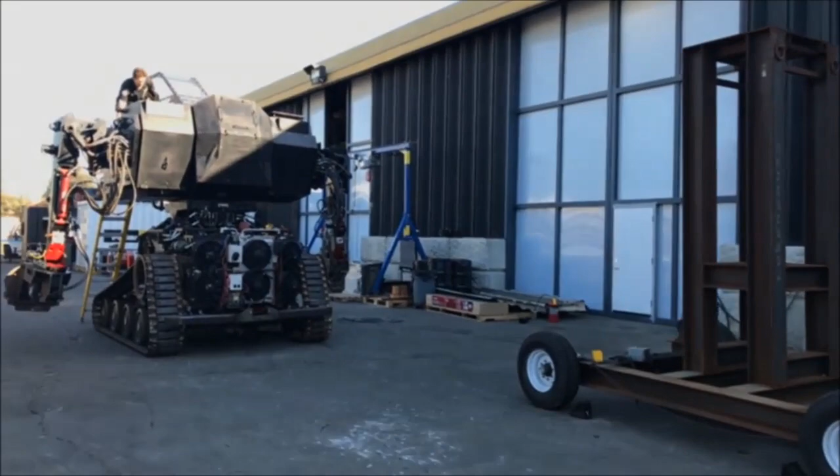Okay so are you getting any of this? All right, so we got a couple things. First of all we got a big announcement. This stream keeps cutting off. Then let's go over here. Yeah, we're cut. Okay, we're just going over to the other side, Wi-Fi's bad. We're going to where the Wi-Fi is not bad. Check 1 and 2, anybody on?

All right, this robot in the background. How about now? Oh, we should stand up. Yeah, get the rope, stand here. Don't worry, cameraman Miles is gonna correct that problem right away. Get the robot behind us. There you go, glorious Eagle Prime, she's got a good backside here. How about that? Yeah, that camera did need adjusting. Good job, G. Camera's good, been adjusted. Stream's back up, yeah it's back up.

Sweet, so we have some fun news for you, Twitch. On November 5th, not this Sunday but next Sunday, we are going to host what we're calling MegaBots Live. Sunday, Sunday, Sunday. So what we're doing is we're starting a set of hopefully monthly events where we just test a bunch of stuff. First thing we're going to test is we're going to take remote piloted robots and put them up against piloted robots. So we have Eagle Prime, we have new driver and gunner pairs for you.

Zoom up there, one of our new drivers, Orion, is going to get up in a second. What we're going to do is take Iron Glory, set it up to be remote control, and we're going to duke it out with Eagle Prime. Eagle Prime's going to have incredibly destructive weapons that we don't trust to be used against a human piloted Megabot. So you guys want destruction, you guys want live fights, we want to give you that, but we're going to do it in the form of beta tests that happen one after another, month after month. We're going to incrementally get better so we get faster robots, cooler action, more destruction, all live on Twitch.

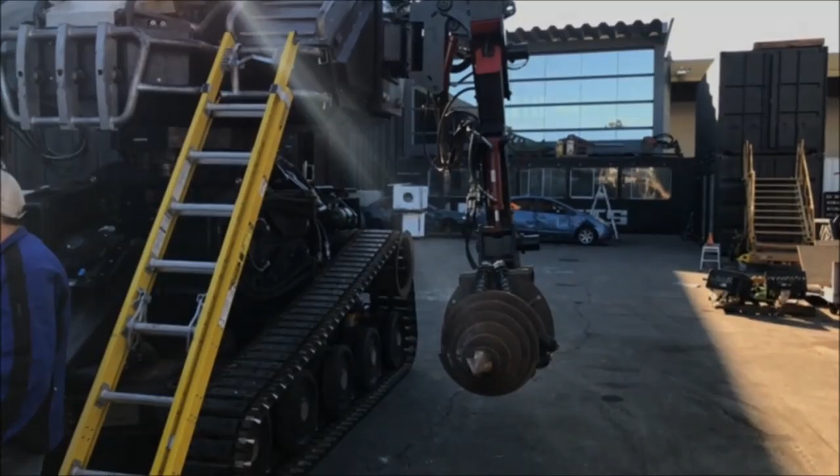And your mission, should you choose to accept it, is to destroy that oven. All right, team, don't disappoint us. Destroy that oven. We gotta do it better than we did last time. So let's keep the robot working.

We got the Tower of Extreme Caution right in the middle of the yard there. When did that change? That's the Tower of Death, that's what it was always called. We're gonna do a couple of slalom laps back and forth, just curving around that as though it was an enemy mech. You guys know the drill.

Let's see what's happening. God, that was terrible. You guys know the drill, go do your thing.

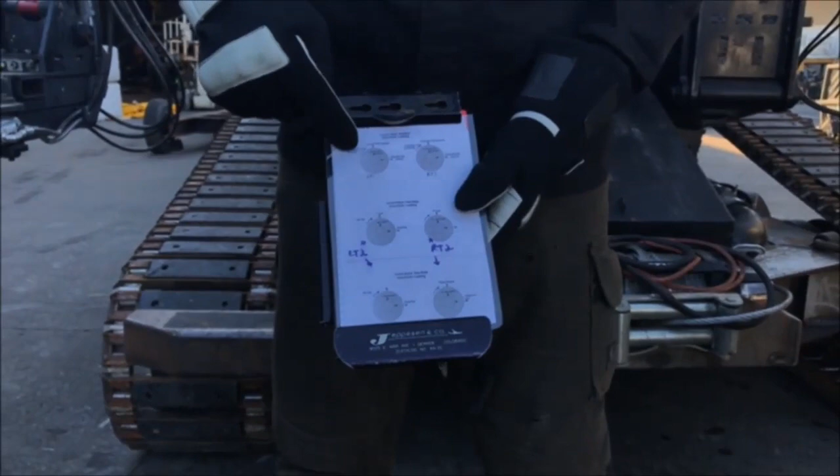Can we get a close up of what we have here? Cheat sheet, this is the in-flight computer. Tim, tell us about this. We have lots of control modes for the pilot that are hard to keep track of. So when those modes switch, I want to make sure I'm actuating the correct actuator. So I have this knee board that has the different controls and certain unlabeled switches that are different for different modes.

Describe what they do. So RT2 up here, it's high. And that's great, we're all set and ready to pilot this thing.

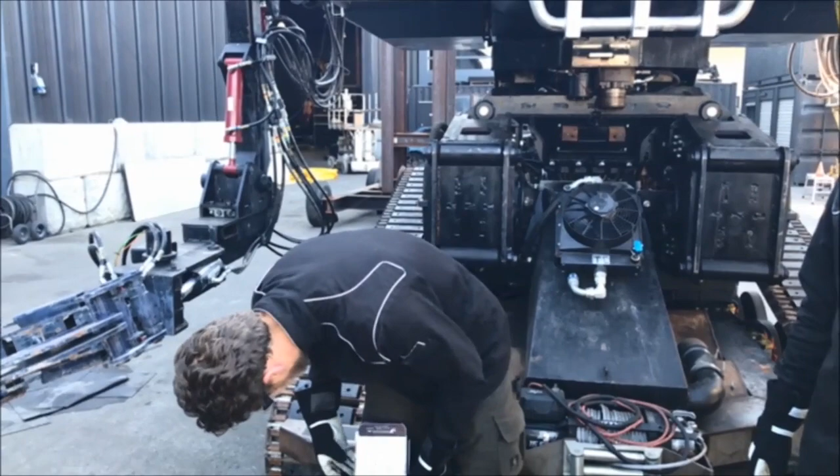All right guys, you guys ready? Up. Serious stuff, robot could break. If it breaks, Micah, you're on ladder. I got fire, cover whatever you need, find an extra fire extinguisher. Be ready. Please stay out of the way, anybody who doesn't have a specific job to do. We're gonna stay on comms, keep the comms clean. If you don't have something important to say, stay the heck off the comms.

If the robot should go sideways and you see an imminent threat to anyone's well-being, you will say stop, stop, stop, and wave your hands like a wild person in the air. This is good. Stop, stop, stop, cool? Who's on E-Stop? Mike is going to be on E-Stop. Is that okay? Sure, fantastic.

Let's get this thing rolling. Okay, first thing's drill, second thing's slalom. After that let's see what happens. No, first thing's slalom, you have to get to the thing first, right? Well yeah, fair enough, okay. Micah, let's find that E-Stop.

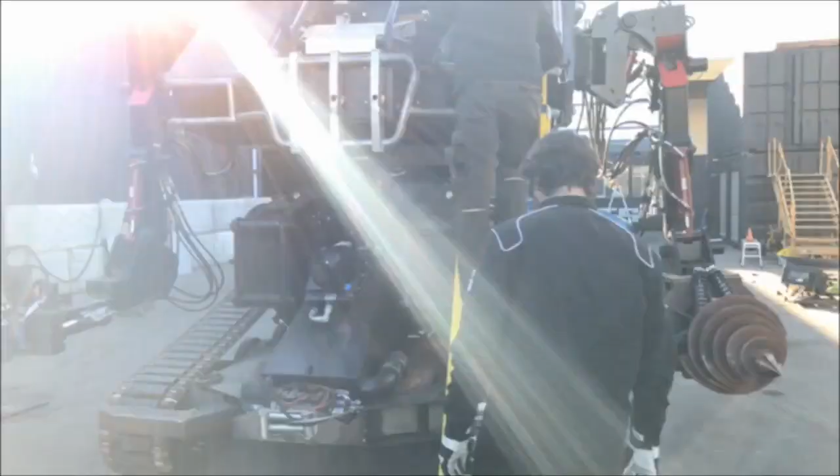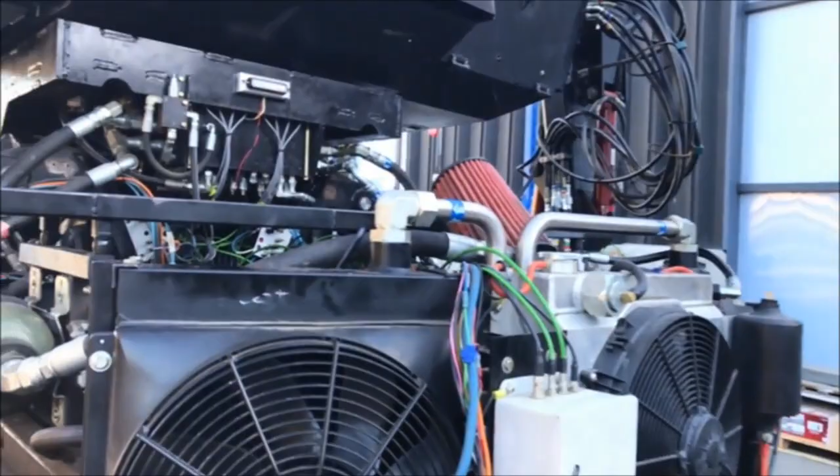So I'm going to turn on the power to the robot right now. Here we go.

Miles, before we get started, I want to call attention to the audience, make sure the audience is being safe up there. Did you check in with Randy? Is he okay? Oh, Randy. See, now we're not. Oh, there's the horn. Randy's a dummy, Matt, there's Randy's horn.

A dummy, you know, you don't have to say that to all of our fans, you know, I bet his mom is watching. You know, Randy's mom, I assume she's watching. I'm gonna grab a radio so we can do - I know your mom's probably watching. Good God, Matt. Hi Miles' mom, I'm going to slap you in a second.

Valves are up, engine coolant's 92 degrees Fahrenheit, fuel's at 58%. We are ready to start.

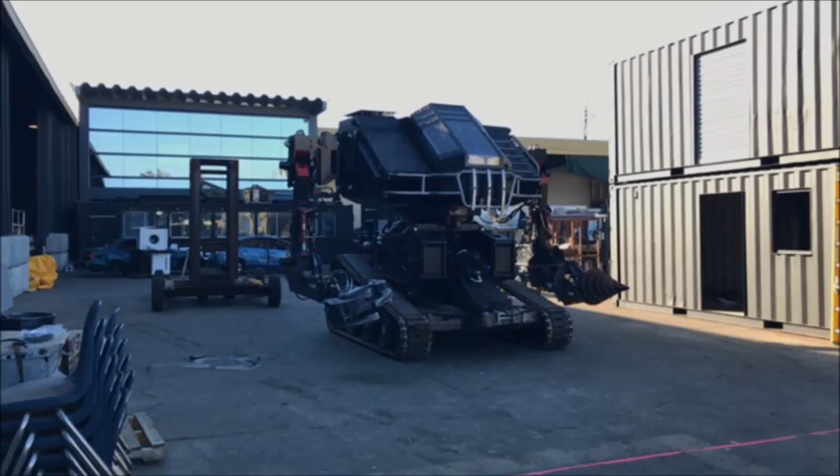Starting. Hang tight Tim, one second. Keep all low please. Yeah, Gurren Lagann, that is the one. All right Tim, sorry, Gurren Lagann, safe. That's where that drill E-Stop name came from.

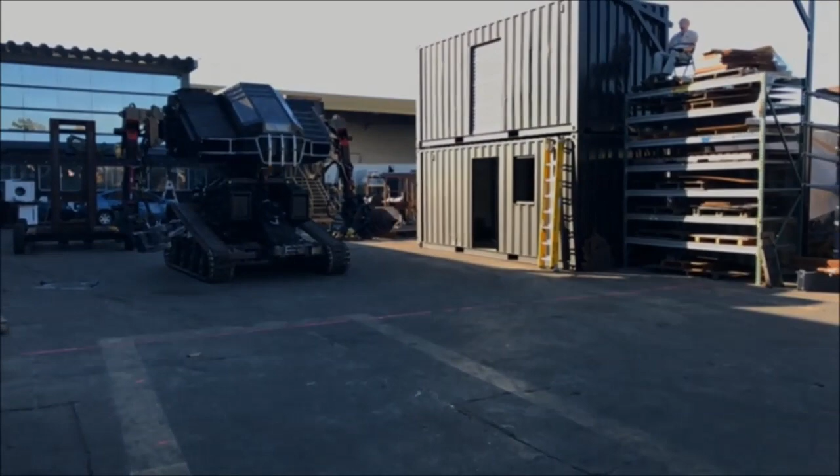What happens is if the hydraulic tubes are cut, it just starts leaking hydraulic oil.

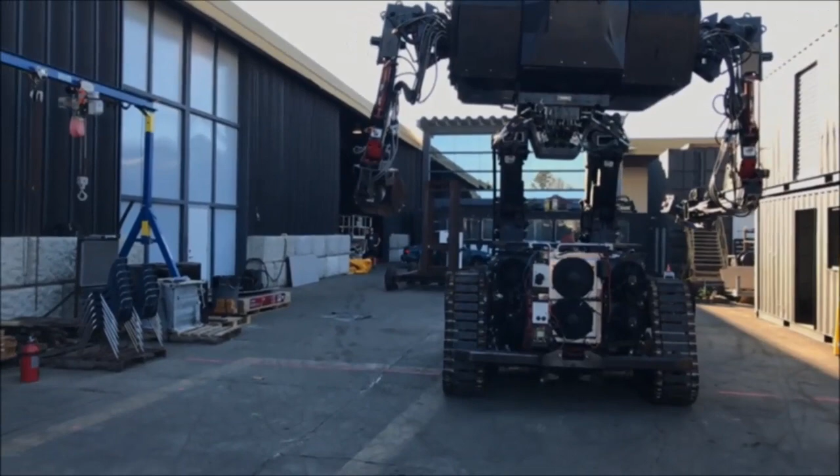Strike that, and there was a hydraulic dropout.

All right Micah, we low? Good. Cockpit, let's sit on. 10-4. Gunner all low.

Is the engine not ready? No, the engine was ready, that was the Beckhoff dropout. Because the engine was fine, it wasn't bogged down, it just happened suddenly. I don't know what we lost because we power cycled too quickly.

It's actually hard to get back far enough in the yard to get the full robot in frame. Copy, clear to start, I'm trying my best. Clear my front.

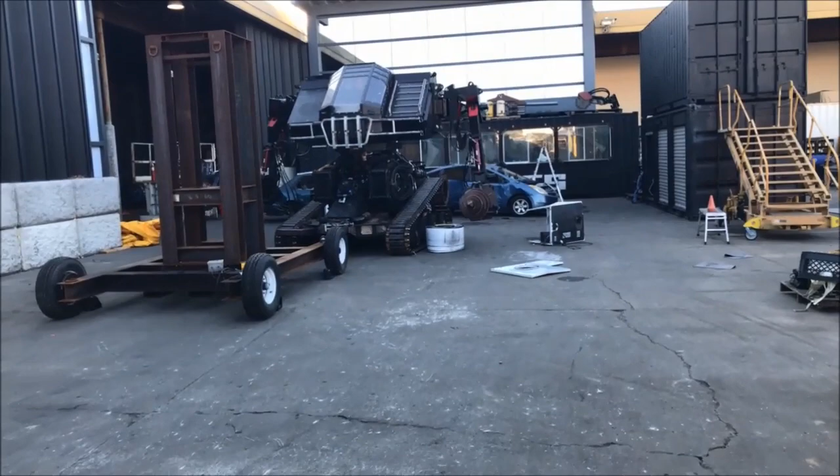And Orion, you're clear to pop the cockpit. Copy that, fresh air.

Oh yeah, that washing machine.

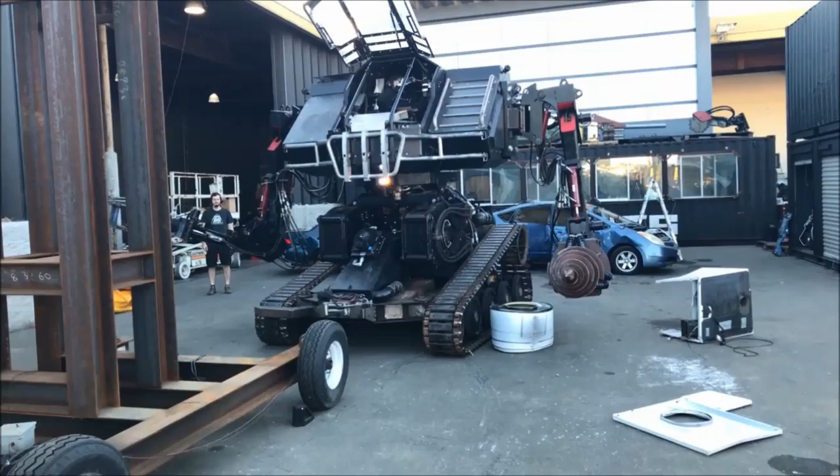And you can see Orion lifting the hatch because it is insanely hot in there. He wants to get a breeze. Cables on the back of the elbow, they are squished.

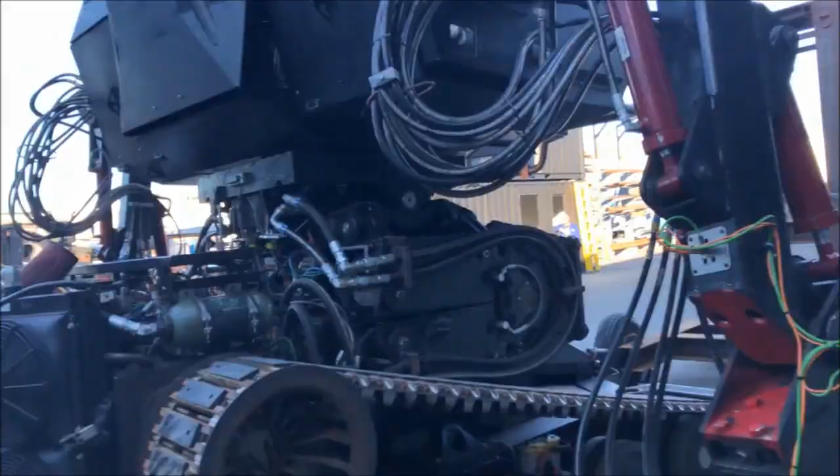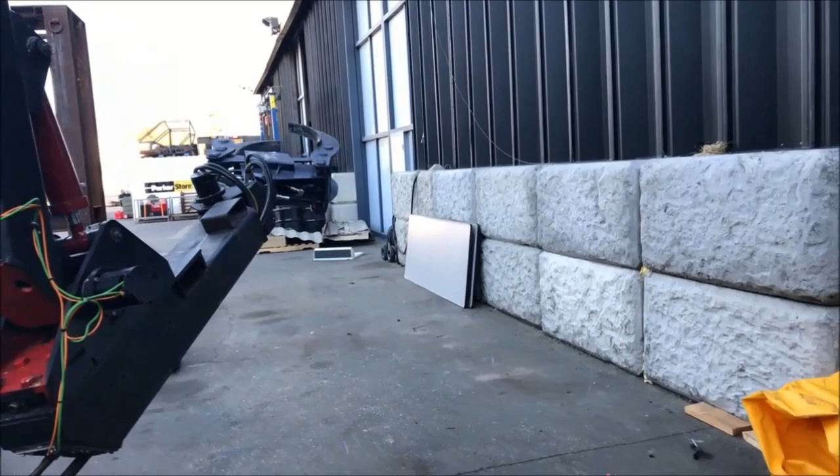Here? Where? Cables on the back of the elbow are squished. Oh look, yeah, some cables got squished. That doesn't look squished, that looks like it got pulled a little too hard. Same thing, same difference. That elbow is...

Right. Yeah, we're... It's nice to see it come down, but you wonder about some of the other temps.

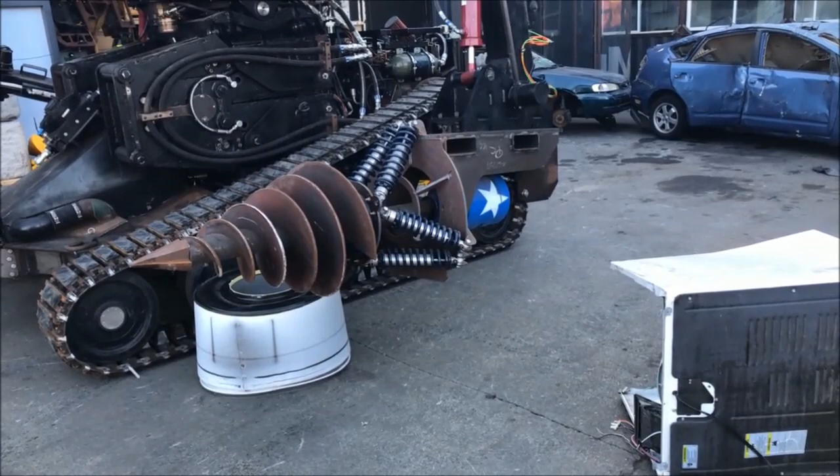There is AC, well, there's a very rudimentary AC in there. It's not very weather tight, the cockpit, so it's very hard to control the heat or control the temperature in the cockpit. So what we have is we have these two fans that go directly into helmets, and nobody wants to wear them because nobody wants to wear the helmets, it's so dangerous.

Except for that one cutout, that wasn't bad. Yeah.

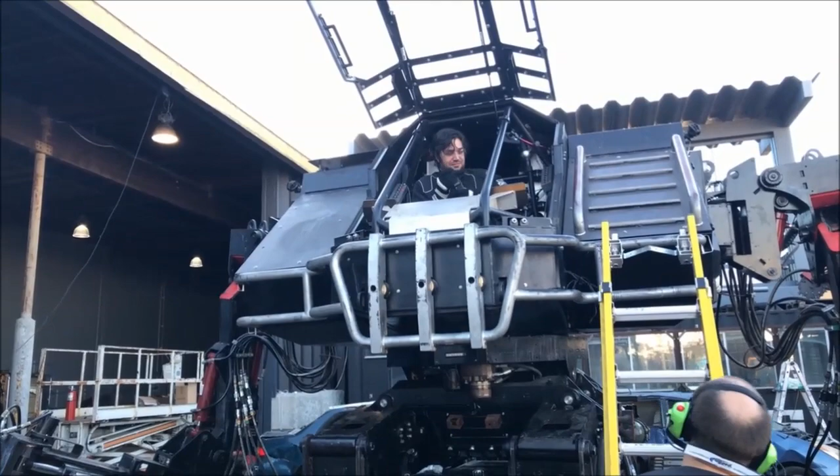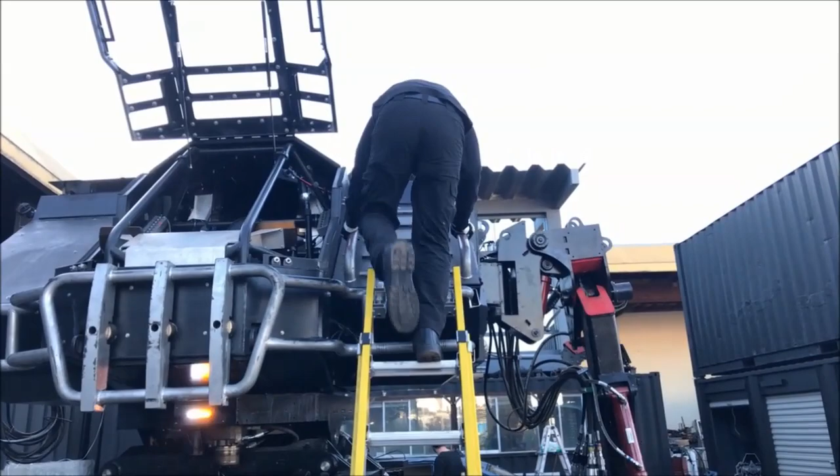That one's on sale. What's that? I said that one's on sale. We could let it go for $75. You shopped at Sears Scratch and Dent, right? Yeah, do we have any takers? $75 for this slightly used dryer. You have to pick it up. We're in the Bay Area. I'm sure you could get this working again.

So how'd it go? Does it spin? Seemed like you had some trouble lining up the drill for that. Yeah, so what I had to do to get the elbow to come out is I had to come much farther forward to get the elbow to pitch in.

I'm guessing that's an interference with the track issue potentially when we're turned back. Oh yeah, it could be a safety for the elbow on the back corner there. So when I first brought it forward to get it to tip in far enough, I was already over the top, and then we had the shutdown.

Yeah, I think the right way to do that is probably actually to pull up alongside it and then reach out or twist forward and straight. But you want to use the extra distance you have from the center line out to the elbow and go straight out. That's what we do on the punch to get a lot of distance.

Yeah, the shoulders are almost all the way forward. Yeah, I think if I did the retract, I could have had it farther forward and more in already, and then kind of... Sure, we can take a look at the controls.

Bunch of crooks. And then Orion, is your phone still up there? It is. Could somebody take Orion's phone and just show around? Do you want me to go up there? Yeah, yeah, do it, go for it.

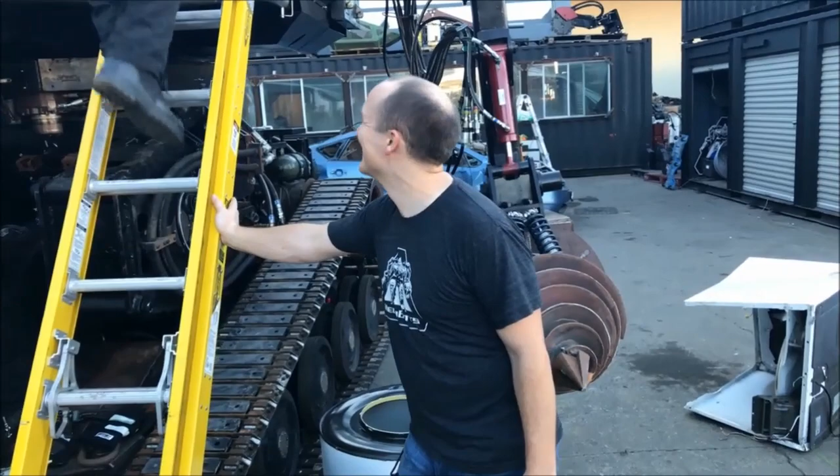So Orion's going to show you the controls after Dan is coaching him with how to punch, though Dan's driving experience is very minimal. So I have expert advice. He has expert opinions, only expert opinions. This is Theory Crafting 101.

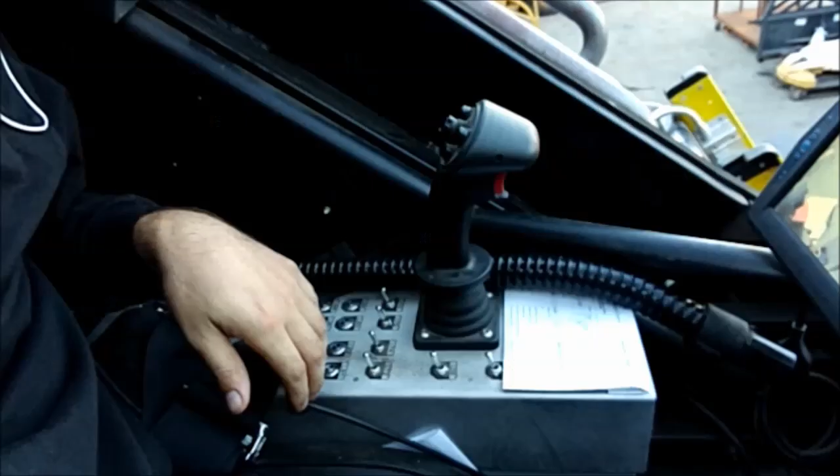So this is the switches. When you hear us talk about the switches, these are the ones that I'm putting all low to be safe, and then we're safing and switching between modes with these. Then over here we've got more switches and buttons, and the joystick. This is a 3-axis joystick, so you get forwards, back, left, right, and then twist up and down. We also have a 2-axis hat on top, as well as a trigger and some other buttons that we don't use.

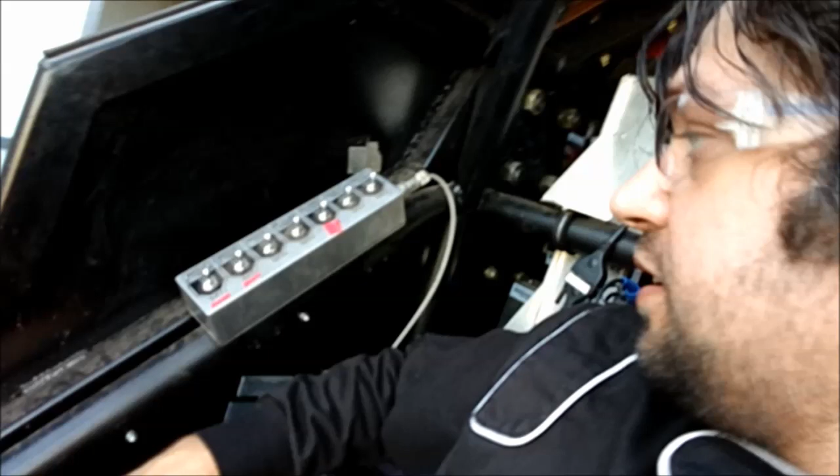Moving my way around the cockpit, we've got the monitors, the gunner's status lights and status monitor, more monitors. Over here on the other side, I've got a whole other joystick, a whole other panel. Essentially it's a mirror image, though the switches aren't mapped that way, but the arm safe and unsafe are mirror image. I've got more mode switches and home buttons down here, and then we run in a variety of modes.

So when I was doing the washer, that's what's called task space, and so when I move the joystick around, it's moving a virtual claw in space and moving that relative to the tip of the claw, as opposed to other modes where we're controlling each joint with each axis of the joystick.

Daryl Q asks, is it comfortable in there? It is not comfortable in here, it's pretty warm. Also, I'm pretty tall, I'm 6'2", and to keep my feet off the pedals I have to kind of retract my knees. When my feet are out over the pedals it's pretty good, but I had some pilot-induced oscillation when I went to yaw back with this pedal. Oh yeah, these are the hip yaw pedals. So basically I hip yawed back and then pressed the pedal more as I got thrown around in the cockpit. It's one of our concerns with the controls, that if I move the arm to the left and then get thrown further to the left, I'll move the stick even farther, or go into an oscillation where I throw it to the left and then bounce back to the right, and you get bad things.

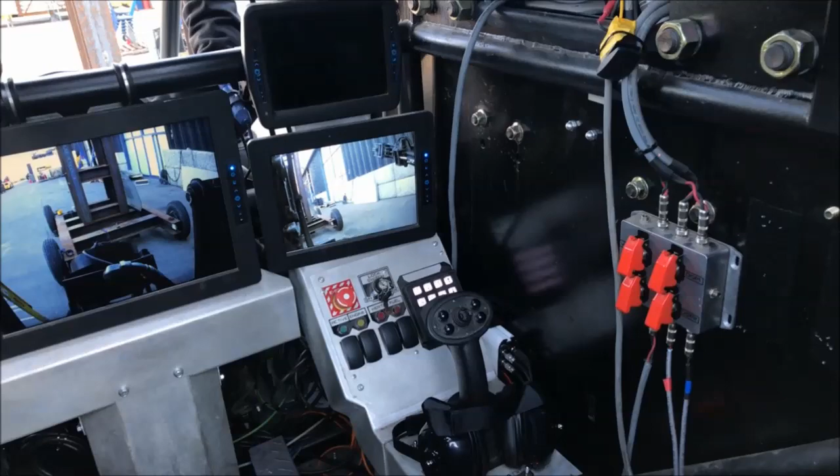So just taking a look around. You can see that right here is the left joystick, controls left track. Over there behind it, you see this red dial, and behind it there's a green dial. That's the drive mode and control mode controllers. There are our safety switches. Over here is the activation switch, the e-stop, and several buttons which are unlabeled, but our VIP mode as well as others. Here's some power cutoff switches.

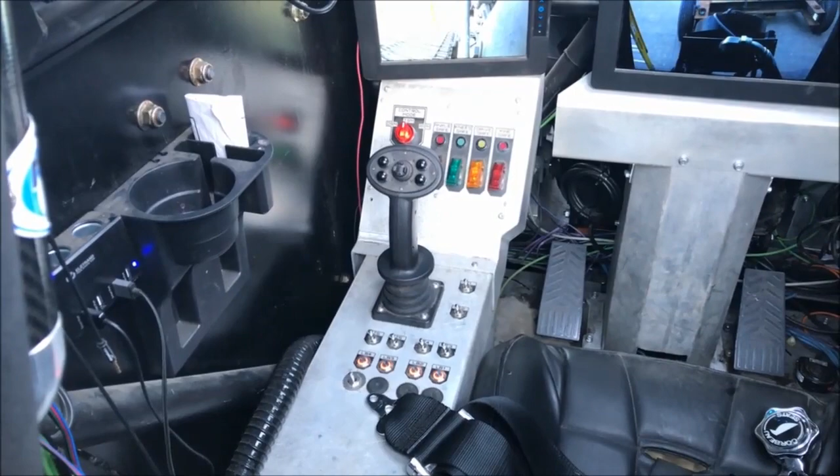We have on each of the joystick panels a whole set of buttons, including the speaker cutoff as well as all the necessary accoutrement. Also, we have a cup holder. And there's the ECP up here. Oh yeah, and then there's the engine control panel, which is used to control the engine on the track base.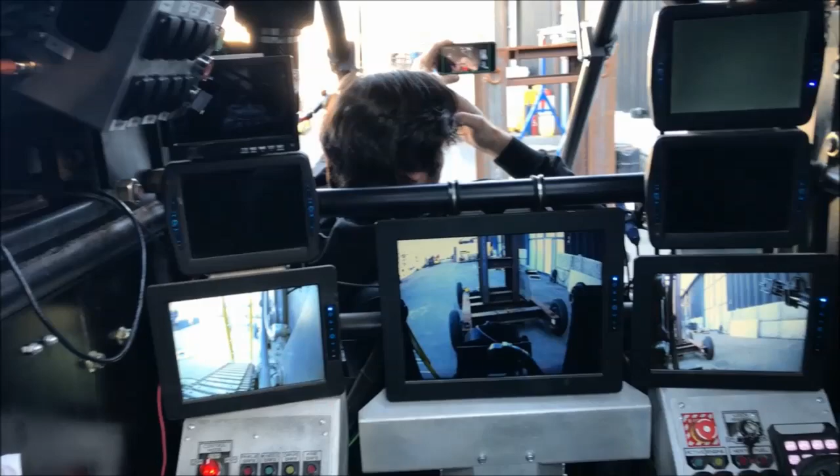And then you can see all the monitors. The few that you see there off are either not associated with the camera at the moment, or they are broken. So the rear camera, for some reason, isn't transmitting. It's something we need to fix, I think it's just a broken wire. And then the other two monitors, that's the status monitor right there, and over here is the over-the-shoulder. Yep, now you can see Miles out the back there.

Nice, got there. We both have beards - solidarity. You're new here, give me some time, working on it, some beard time. It's in your contract, in our corporate charter, you have to have a beard to practice robots. Get out the calipers and measure Orion's beard - is it long enough? No, it's only 7.5 millimeters. Or at least have a container of so many ounces of beard in your pocket. You can just harvest someone else's beard. We need a beard donor, quick. Alright, I'm gonna get down.

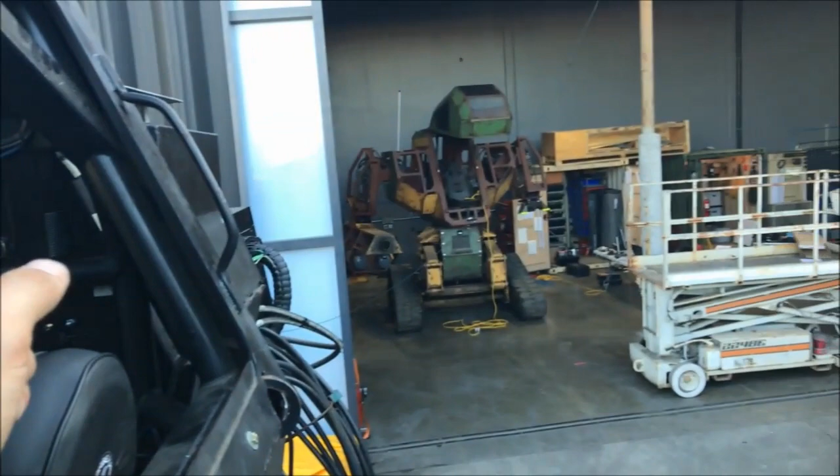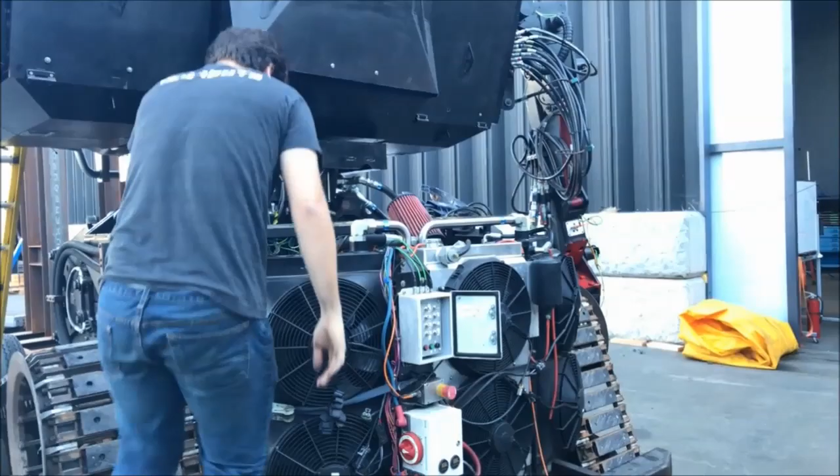So we mentioned that we have another robot, the Mark II. We just finished putting some new functionality in it, giving it a control system. You'll see it possibly next week, we're still working out some of the bugs. I'm gonna give this to Zach for a second so I can climb down.

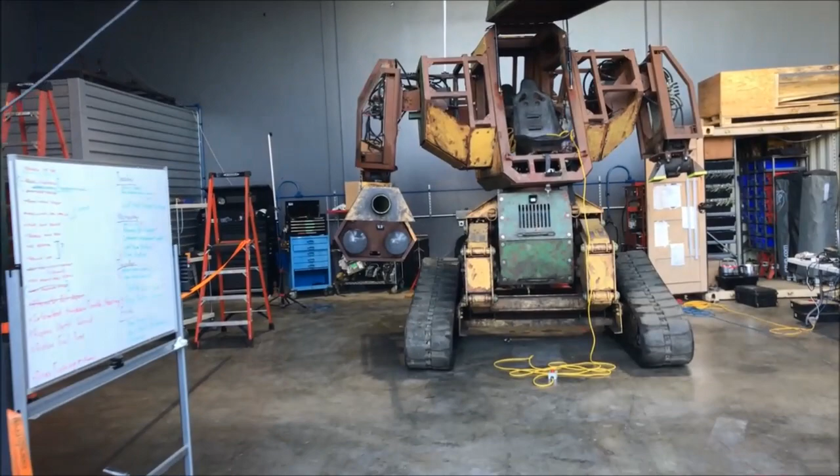So basically what we have over here is the remote control Mark II, or at least the Mark II that we are making remote control. You can see that we've taken off one of the weapons, the missile launcher. We might not be able to show that yet, because I don't know if it's done, the new thing that's going on there.

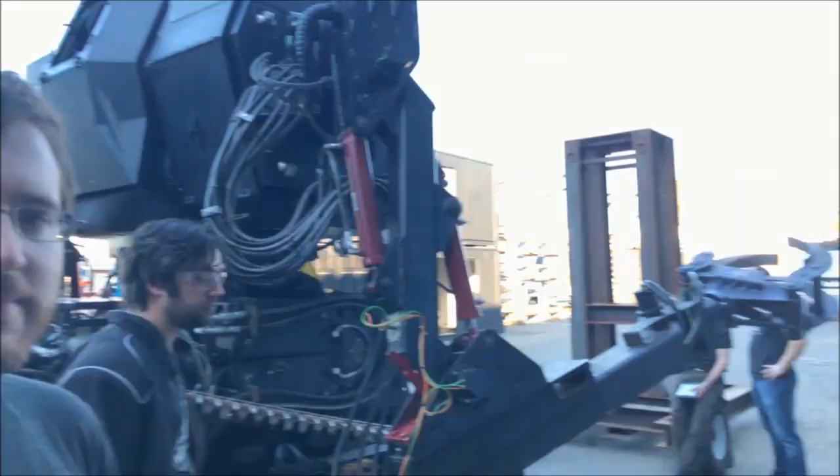Zach here has done all the wiring. He is the electrical tech here at MegaBots. Yes, I do the grunt work, I crawl in the robot, I fish all the wires. Sometimes that's what you gotta do to get the wires through the machine - the electron hoses, portals, Pixie pipelines.

So the control system in Iron Glory used to be ROS, that's Robot Operating System. But we have this nice control system in the Mark III, made by IHMC, which we are backporting to the Mark II so we can use the same code and make it very simple. The Mark II versus the Mark III is maybe 2 or 3 orders of magnitude more complex - the Mark III is much more complicated, more powerful and faster. But porting the thing back means we can now use some of the tricks we used on the Mark III on the Mark II.

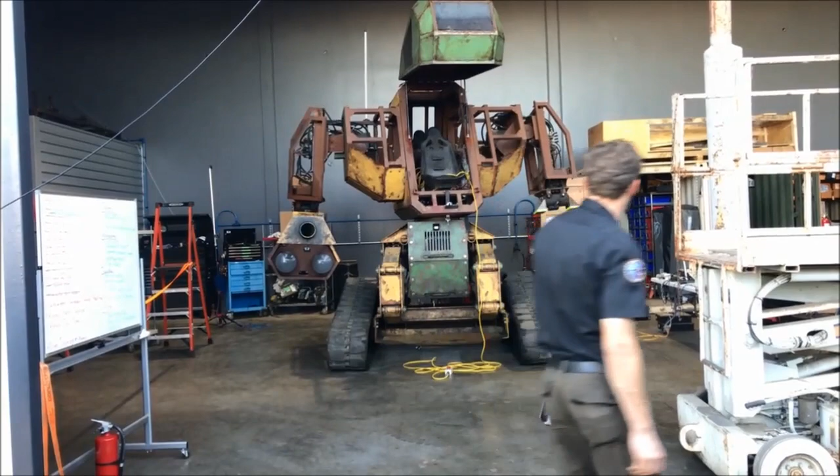Also those checker patterns - I've heard those really help. Also, if you paint chevrons on the ground, when you go over those you'll go faster too. We need to paint some chevrons on the ground, I've heard those make you go faster as well.

Is Zach, like, how far along is Zach on the pole? You want to go walk over and see the new melee weapon for the Mark II? Take a walk and see where it's at. I don't know, Twitch, would you like to see that? It's over in fabrication, I don't know if Hannah's working on it right now. Yeah, we'll take a look, see if Hannah's working on it.

Kind of a cruel irony - I had to plasma cut all the parts out for the weapon that's going to fight my robot, the robot I'm piloting. You're the one making weapons for your opponent. What's going to happen is you're going to get hit by the weapon you've made, and it's going to crash through the cockpit, and you'll be like, I remember this part.

Why's it been so long filing the tip? Plasma cutter, oh yeah, that's right. There are chevrons on the ramps - that way you can just select the super speed for it. So we actually do have ramps here.

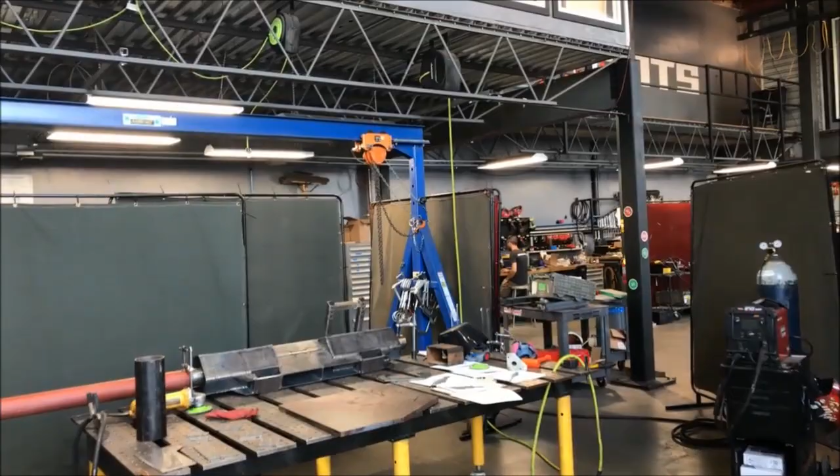If you go talk to Zach, I bet he would show you some fun CAD stuff. So we're gonna go talk to Zach.

So Zach is our lead fabricator here and shop managing guy. Hello. Not to get confused with Zach 2 or Zach Beta. Yeah, it's not the easiest system we have around here. In fact, we're going to have to develop something better. Better for the Zach nomenclature. I still like New Zach and Zach Classic. It's one of my favorites. So what would you like me to talk about?

The weapon that you're making for the Mark II. Did you want to see CAD models? So we're just gonna give you a demo of what we're making. Zach here modeled this thing up. This is a design for a melee weapon for Iron Glory. Iron Glory only has range weapons on it right now, and our new art director Kenny Solis made a sketch, and it looks pretty good. So I went and rendered it in AutoCAD.

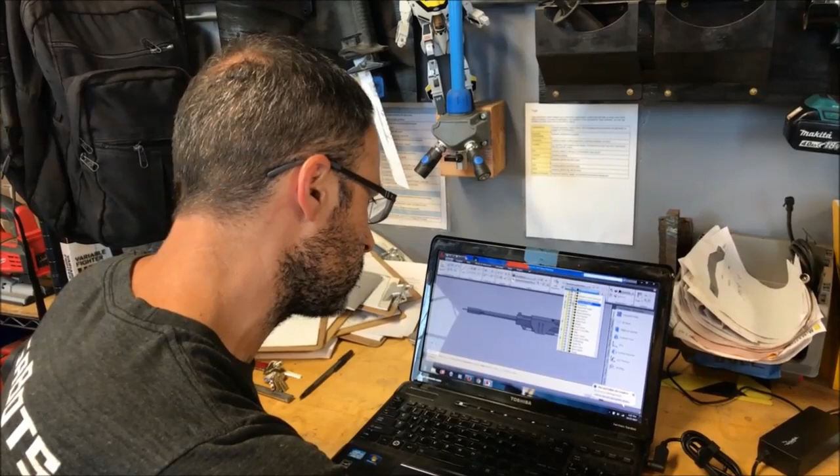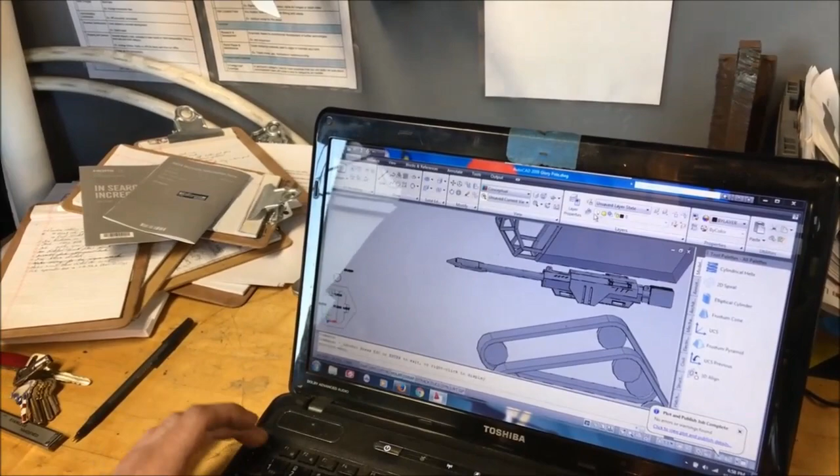Let's see if we can pull up a couple of different layers here. This is kind of what it might look like on the Mark II Iron Glory. This is the piece right here. It's sort of a spear-shaped object for Iron Glory. A couple of different views here. I'm gonna get rid of the Mark II for a second.

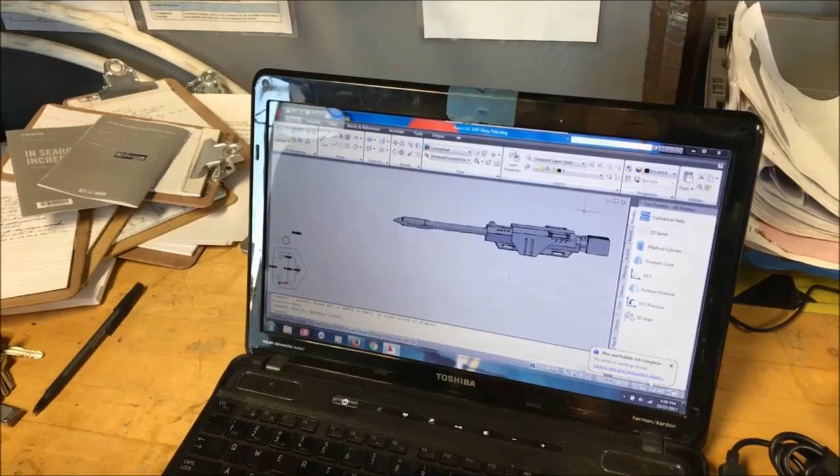So why is it a spear? Tell us why this shape. Well, this was all Kenny's design. We needed a melee weapon so that we could poke around in battle rather than shooting the two range weapons that are on there. It didn't have to be a spear, but this particular one might deal some pretty nasty damage to the hydraulic hoses of anything that fights.

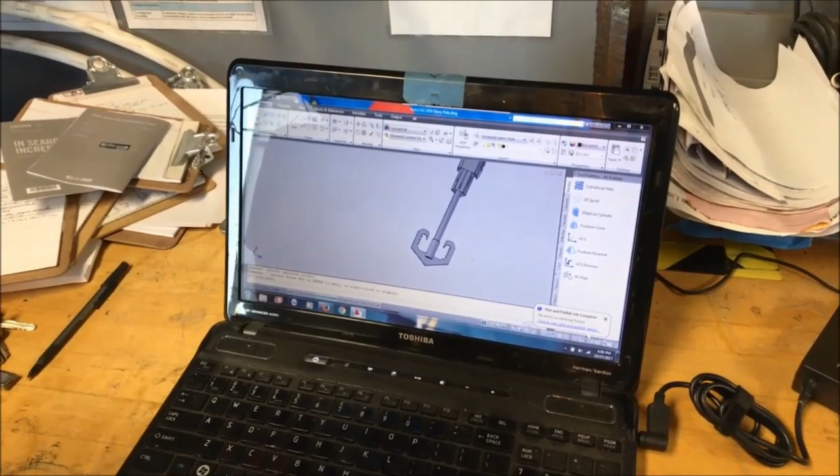So the idea is to hook onto the hydraulic hoses, yank them around, something that it can pull off. When he showed me this shape, I'm like, if this gets onto some hydraulic hoses, it's not coming off of it. They're going to get caught in here, and our robots aren't as nimble as we'd like them to be, so it's just going to back up and pull some stuff off. It's going to be interesting.

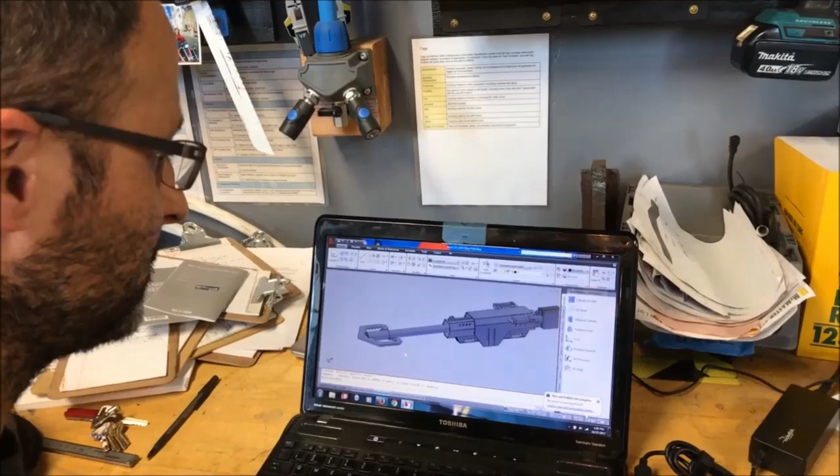So viewers might notice that there's a lot of exposed hydraulic hoses on the Mark III. The thing is that the Mark III is faster, stronger, and just overall better than the Mark II. So I believe Zach, Kenny, and Hannah decided that the best way to fight the Mark III with the Mark II is to fight dirty. As dirty as possible. Well, once you start messing with hydraulics, things do get pretty messy.

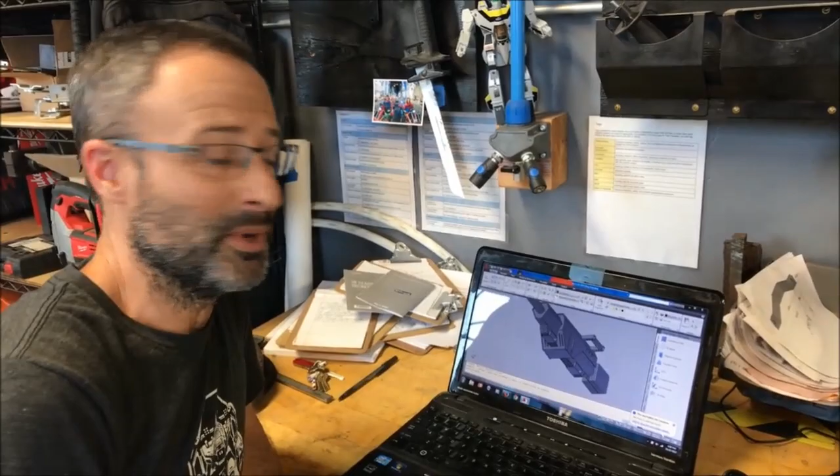Yeah, so you want to show us? You said you fabricated a bit of it? Sure, so we're going to go take a look at what we have right now.

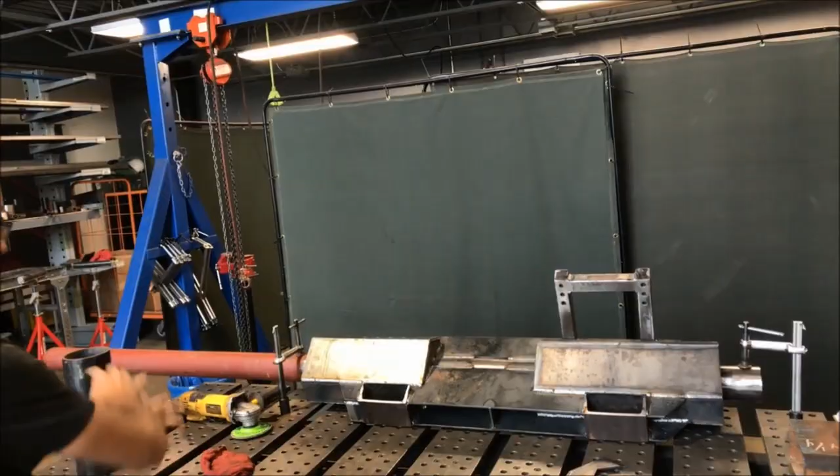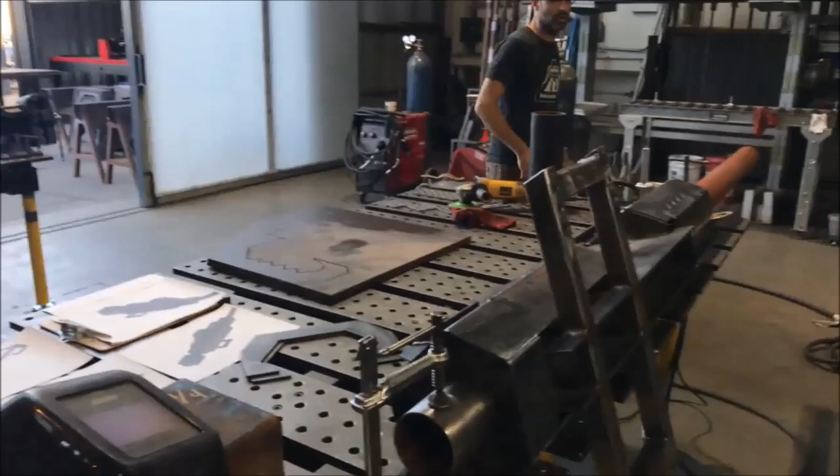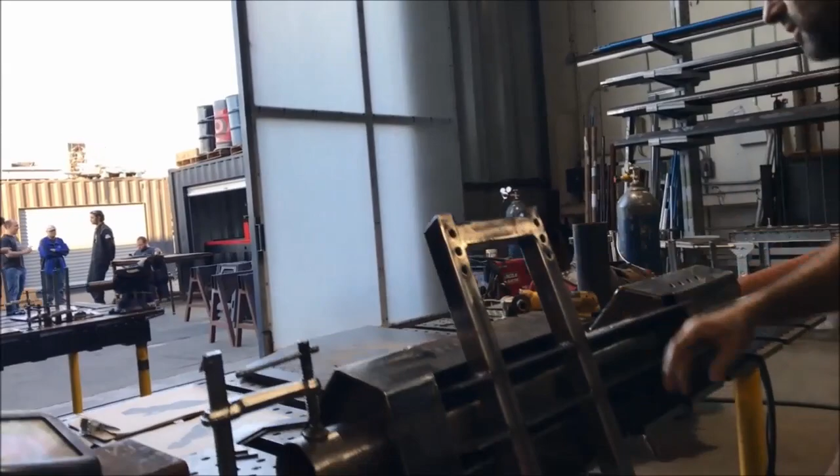This is where we are right now. The whole piece will be about 9 or 10 feet long when we're finished with it. We have primarily 3/16 plate steel. As you can see, the elbow of Iron Glory is going to bolt on right here. So this is that interface, and most of the weapon is going to be cantilevered out to the front of the support. So we're going to add a counterweight to the back to try to balance it out.

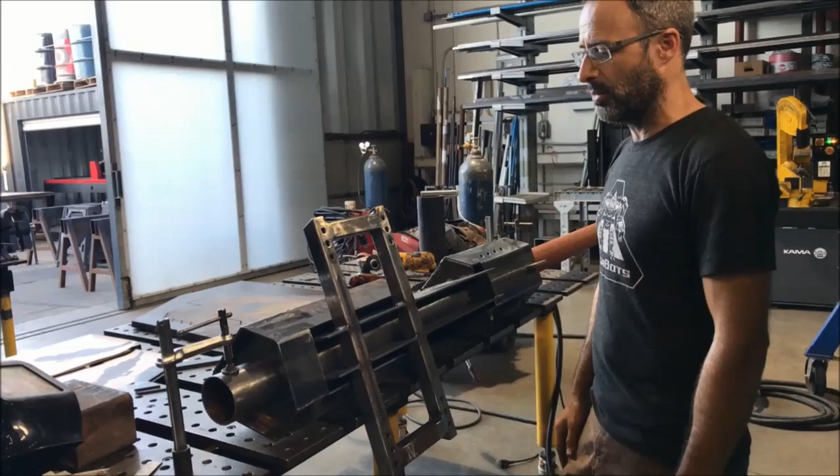Iron Glory doesn't have a whole lot of power to it, but the weapon that we pulled off of it weighs 700 pounds. So this one's probably going to weigh about 200 to 300. So it shouldn't have nearly as much trouble swinging this thing around as the old one did, which could be a little bit cumbersome.

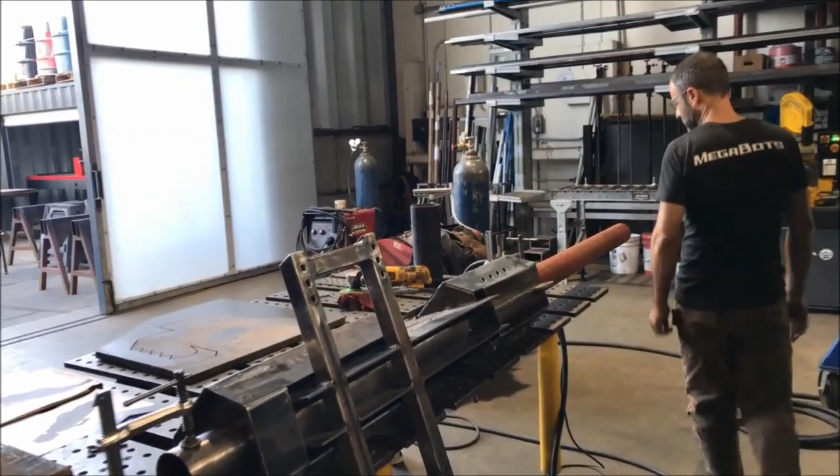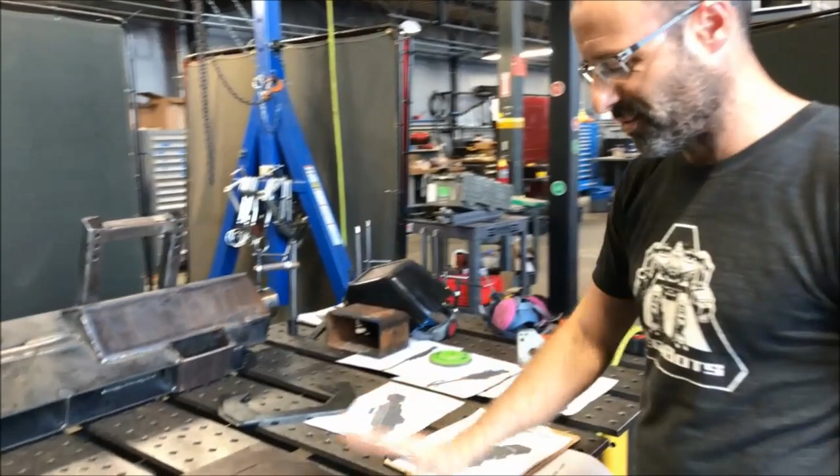And then we've got more plates to put on it after some of this gets cleaned up. And then we had a bit of a snafu with our CNC plasma cutter.

This will eventually be the spear, as you can see, the spear tip. As you can see, it only cut out half of it before a component exploded inside the plasma cutter. Our plasma cutter is having some issues, so I'm going to have to finish this over the weekend. Massage it back to life.

Something like that. So how big is that spear tip? It's 24 inches across, edge to edge, and about 22 front to back. So hopefully that gives you guys a bit of scale on how big these things are.

3/4 inch plate. I think Kenny's design called for something a little bit thicker, but our plasma cutter maxes out at 3/4 inch plate, and then this is what happened to it. So maybe we were pushing the limits. I don't know. Unfortunately.

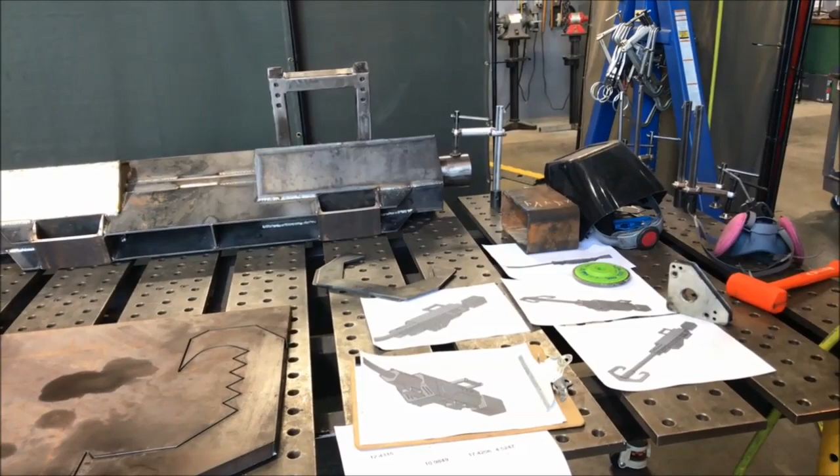So you're gonna cut that by hand? No, I got another plasma cutter I can bring it to over the weekend, and another CNC. So if that one starts to hiccup on it, then I will finish it by hand. That's kind of a last resort, because this ended up doing great up until it just conked out.

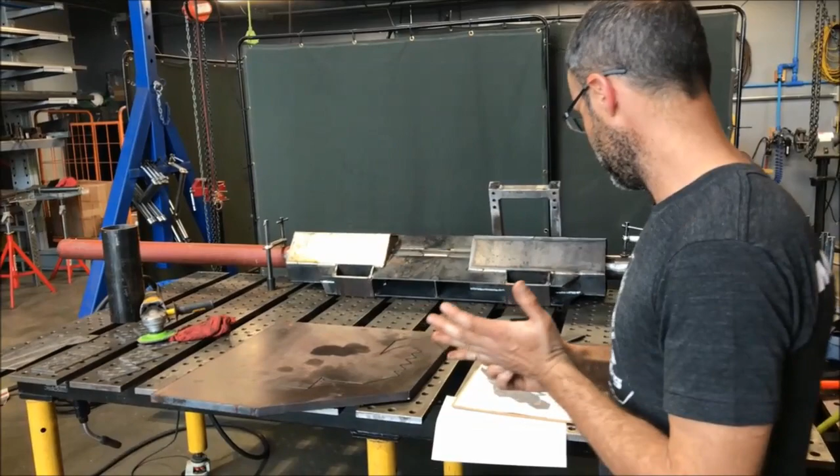But the edge was beautiful. It's not going to look nearly this nice if I cut it out by hand. It's going to be all serrated and stuff, a little bit choppy. Well, you're going to have to work that edge anyway. Besides, it's just there to cause damage, so it doesn't have to look real pretty. Exactly, the sharper it is, the better.

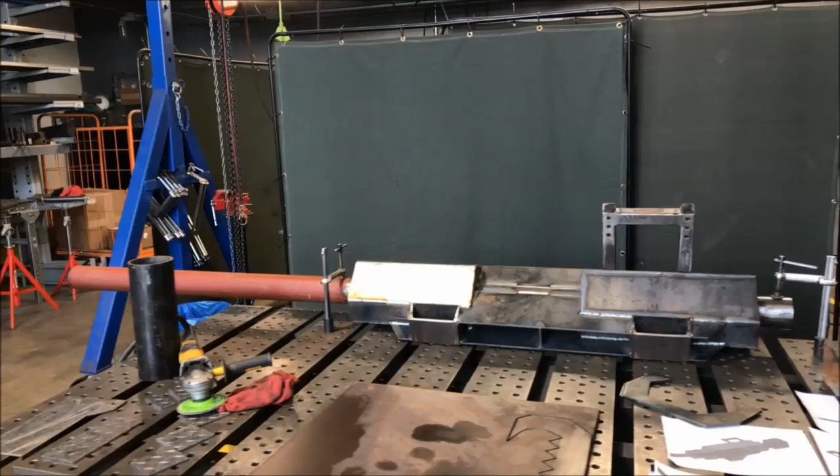You can see that structure, that's going to be made up to where the rocket launcher was. As I said before, in Japan it kind of broke. Additionally, it wouldn't do anything against the Mark III, so might as well take it off and try to give the Mark II some sort of chance. I think the Mark II has, the dirtier we fight, the Mark II has a better chance anyway. Remember, just go for the pilots. Go right for the pilots.

So yeah, there's the Mark II weapon. I think that's all we were going to show you today. Hope you guys enjoyed the stream, and the test, as well as the Mark II.